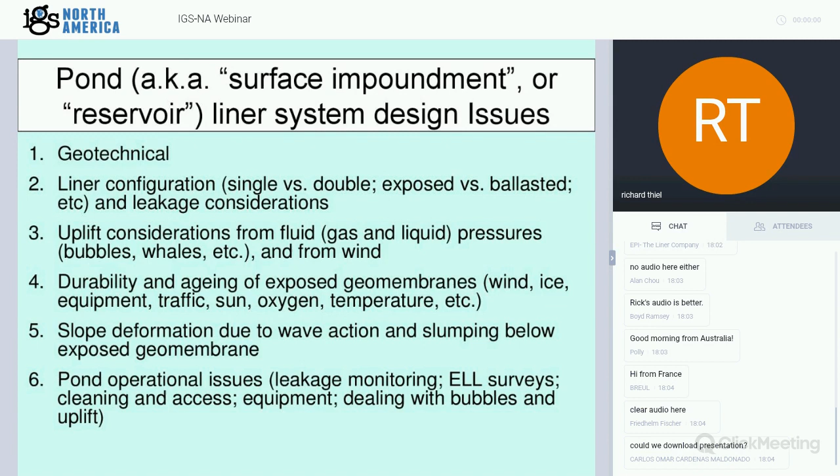So we'll dive into it on the first topic of the geotechnical concerns with ponds. So I have four geotechnical concerns that I typically think about when designing a pond. And the first one has to do with understanding the hydrogeology and the geology that's going to occur below your facility.

It's very important to understand where high groundwater will be, especially when you have a lined pond. So don't dare design a lined surface impoundment or pond without understanding where the high groundwater will exist, because that has a lot of influence on consequences that can occur with your lining system. Typically you do some borings and you understand the geology and the hydrogeology. Typically the project will involve excavation of the soils and embankment construction to create the dikes for the pond.

The soil type will influence how the dikes react against loading conditions for potential saturation, for slope stability, and for the subgrade preparation for the lining system. So understanding the soils that you're working with is very important.

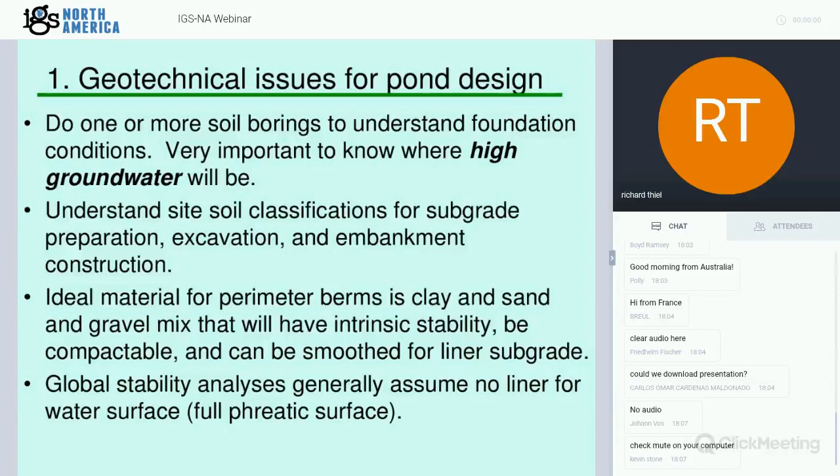And then finally, the global stability analysis of the pond structures is an important aspect of every project. You can have whole courses just on global stability analyses. I just wanted to mention that relative to liner systems in ponds, the standard engineering approach is to assume that there is no liner

extant when you're doing your global stability analysis. There have been a number of case histories showing that, in fact, a full phreatic condition can occur through the perimeter dikes as if the liner's not there.

If you don't assume that, you're not following industry practice, and there have been demonstrated failures because that was not considered.

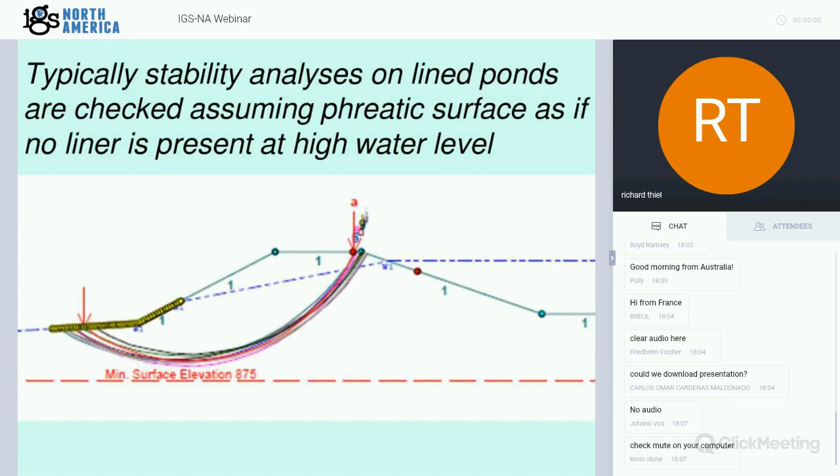Part two of the outline is how to decide on what your liner configuration would be. Later on, we'll discuss perhaps choosing a type of geomembrane. That's not what I'm talking about now. It's what is the configuration of the liner system?

You could say no liner system. For example, on the very large dams and large reservoirs, typically they're earthen or concrete dams, but you don't necessarily have a liner all the time. But this webinar is focused on ponds that do in fact have geosynthetic liner systems.

So you could have a liner configuration that has a single geomembrane, for example. You could have a double liner system with a leakage collection layer in between, which is very common for most important ponds.

Then for the upper geomembrane, do you leave it exposed, which is very common for reasons of capacity and cost, or do you cover it with soil to protect it? There's various reasons we'll go over later, but if you protect it with a ballast layer, that's a very key decision to make up front.

And then finally, is there a need to control fluid pressures below the liner system? You may have high groundwater conditions. You may need to consider controlling leakage through the entire liner system, and you may have air and gas fluid pressures existing. And so you may design some sort of an underdrain. So you have key decisions to make on your liner system configuration.

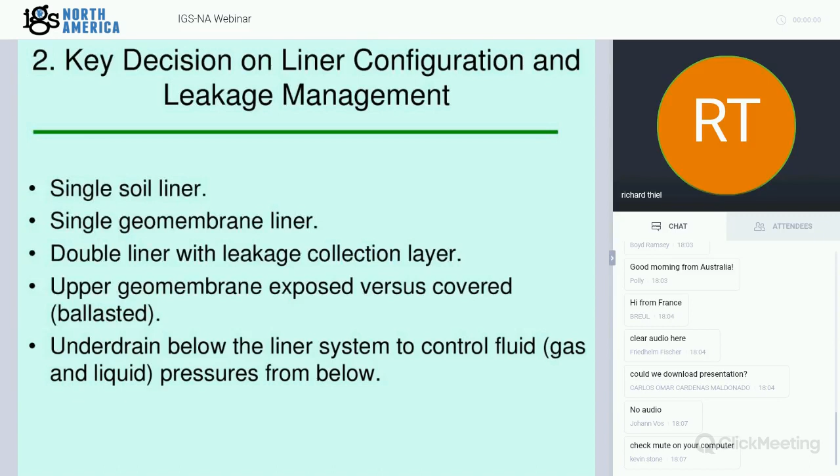Part of that decision has to do with how you would manage leakage. Leakage is something that I believe is mandatory to consider. J.P. Giroud, considered a father of the geosynthetics industry in many regards, has an adage that the industry holds, many of us believe is true, that all liners leak. No matter what the quality of the initial liner material is, or the level of care that the contractor takes, or the scrutiny of the CQA program, I believe that you should always assume that the liner will leak.

And they very often do as they age. There's a lot of emphasis on a push towards zero leakage in the conferences. It seems to be a popular topic. I personally feel that it could lead to some misguidance if people believe too strongly in zero leakage. I think you have to assume there's going to be leakage and wrap your arms around it in all projects.

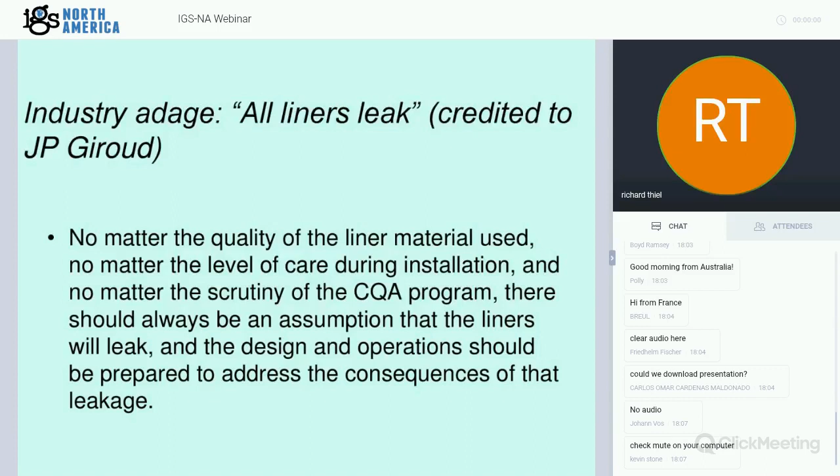Therefore, you must, I believe it's incumbent upon you to address the consequences of leakage. And once you understand the consequences, then you can make the design decision on your liner system configuration. So I list here 4 consequences of liner leakage in a pond.

And what's the difference between a pond, say, and a landfill? One of the key differences is the high head situation. And so the consequences of leakage can be much greater. So certainly we have environmental consequences. If the contained liquid has chemicals in it that would contaminate the soil and the groundwater below, so we all can relate to that.

We can have significant geotechnical consequences. Of course, high earthen dams, that's the primary technical issue, are the geotechnical consequences of how seepage occurs through these dams. But in a lined pond, unanticipated leakage can result in piping, tunnel erosion, leading to sinkholes, saturation of the embankment that may not have been anticipated that can lead to slope failures.

A third consequence is the operational problems that can occur. One is the loss of valuable solutions in the mining industry or industrial plant, or water for a decorative pond, or a pumped storage project where you want that water available for nighttime generation of electricity. Also, if you have leakage, you may have to shut down the pond to fix the leak. So these are operational consequences of leakage.

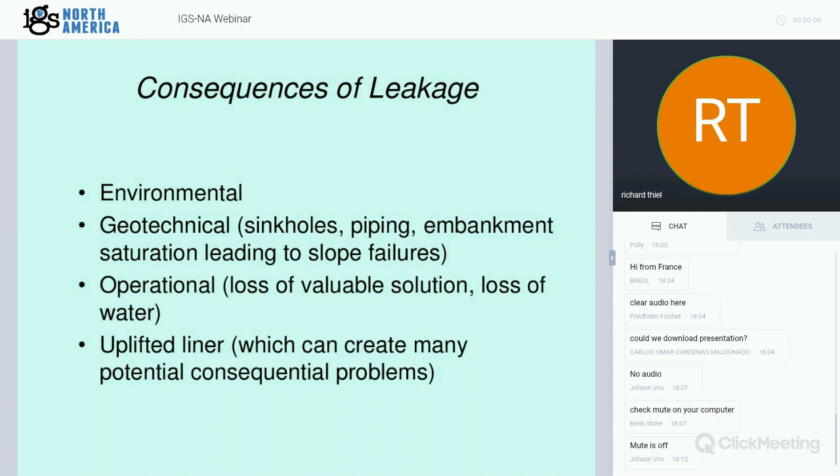So, recognizing those consequences, we could say that there are 4 levels of leakage control. One is none whatsoever. There's no monitoring, there's no collection, you have no idea how much is leaking, and that would have to be a non-critical situation, a decorative pond where you kind of hope to slow down the percolation into the ground, but if there's some leakage, it doesn't have any real consequences.

The second level is you might have some control but no real detection and no real collection. So you might design some sort of drainage gallery underneath, but it sort of disappears, and there have been cases where there is confident control of leakage that it will not create a geotechnical problem, but there's no real monitoring. Again, this would be a non-critical situation.

Then there's a third level of control where there is perhaps a leaky foundation, say a pond. A lined pond is retrofitted over the top of an old concrete or an old asphalt foundation that's leaky. You have some monitoring, some indication, perhaps some ability to collect the leakage, but it's not pervasive at 100%. And so again, that leakage has to be acceptable.

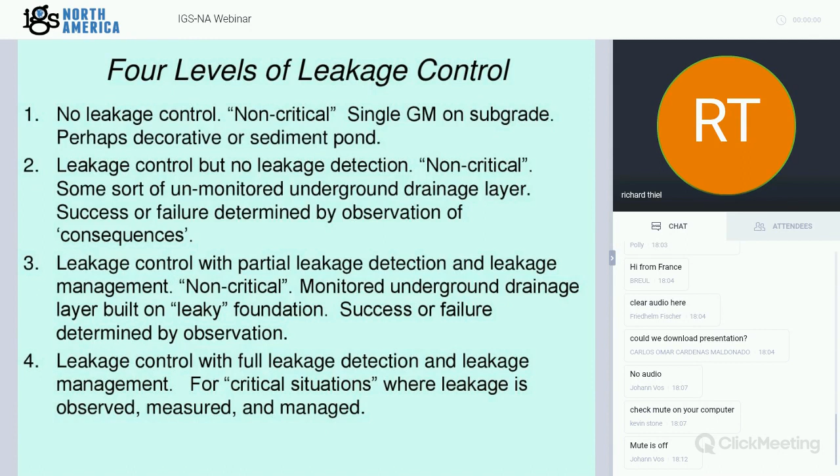The fourth level of control is for most critical situations where it would be unacceptable to have a significant quantity of uncollected and unquantified leakage. And for most important ponds, this is the case.

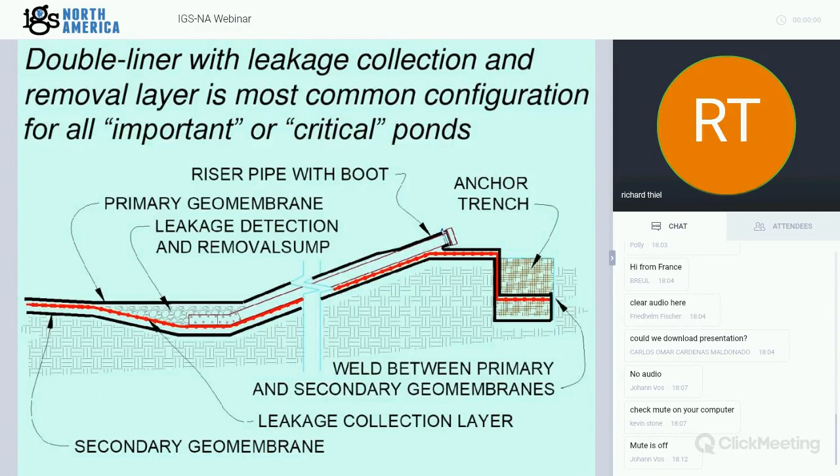For most important ponds, by the prior reasoning, you would have to conclude that really the only effective way to know that you're collecting almost all of the leakage and you're able to quantify how much is leaking is to have a complete double liner system with a leakage management layer in between the two liners, such as this diagram shows.

For those types of facilities, you would have a double liner with a leakage collection layer between, such as a geonet or a gravel layer. There would be a sump at the low end where you would be able to monitor and pump out the leakage or drain it by gravity.

You would have to have a slope typically on the bottom of your pond. I'm recommending a 1.4% average slope as a somewhat dependable slope to create drainage and to allow for the movement of gas bubbles.

If you have less than 1.4%, there have been examples where localized high spots and depressions caused by grading tolerances and soft subgrades will not give you dependable drainage and you will not have a dependable mechanism to move bubbles or hippos or whales in the pond. So that's a published number that's been derived, the 1.4%.

If you need to make penetrations in these types of ponds, it's generally best to make them perpendicular to the liner. That's the best configuration for creating a good penetration and one that can be repaired.

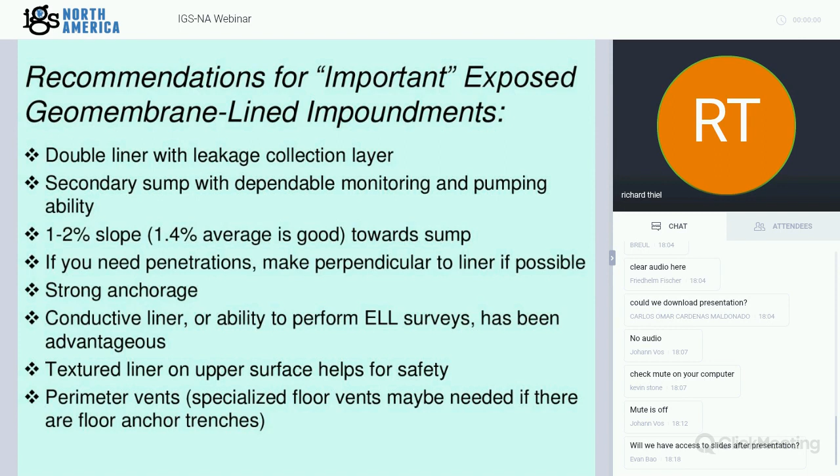If you have a double liner with a leakage detection layer and a collection layer, there are various materials that can be used. You want high transmissivity materials between the liners. Generally, a gravel or a geonet or geocomposite are very dependable materials.

I've also actually used the space that's created between two textured geomembranes where one is laid right over the top of the other, and measured the transmissivity of that space and found it to be quite acceptable.

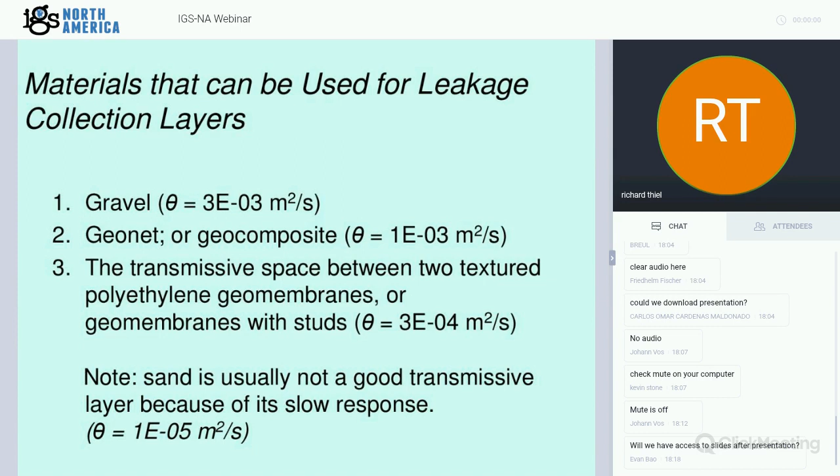This compares to a poor transmissivity layer, which is sand. Fine sands and medium sands actually impede leakage quite a bit. They don't drain very well, and then you have problems between gas and liquid phases blocking each other's flow. So sand is generally not a good layer between two liners.

This 20-acre pond was divided into 5 sectors, and one of the sectors, 4 acres, in fact, reported leakage. We were able to estimate the size of the hole by the leakage rate. We were able to locate the hole, and basically it validated this technique of using simply 2 textured geomembranes to provide a transmissive space.

So it was a project-specific design. Interesting case history.

Now, if you have leakage between your liners, what is an allowable leakage rate? Or sometimes it's called an action leakage rate, the leakage rate at which point you would do something, such as shut down the pond and look for the leak and repair it. So this is a good question.

Often it's regulated. It might be written in the permit for the actual facility. There's been various surveys done, and there are various regulations that we can look at. A number of, for example, 5,000 liters per hectare per day, and you divide by 10 to get about 500 gallons per acre per day, is a type of leakage that's common, say, around the Great Lakes of the United States for various types of wastewater ponds.

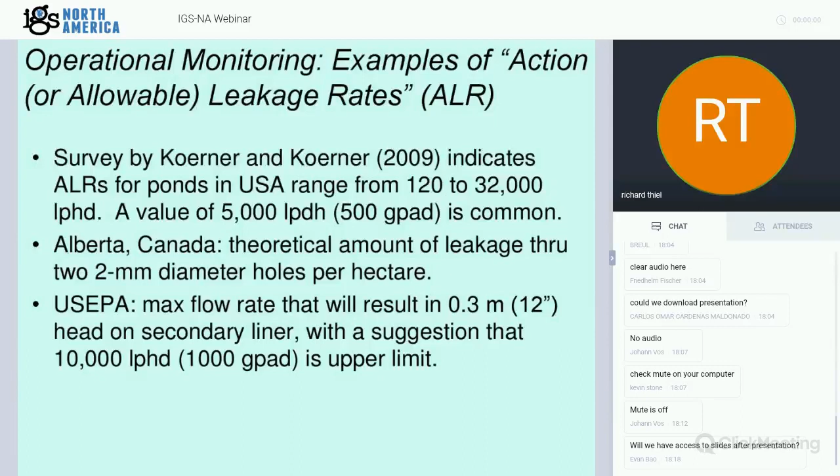There's an example from Alberta, Canada, for ponds in that region where the allowable leakage rate is the theoretical calculation of leakage through 2 millimeter diameter holes per hectare. The US EPA for wastewater ponds suggests a maximum flow rate leakage rate to be allowed that would result in a 0.3 meter or 12-inch head on the secondary liner. They provide a suggestion that 10,000 liters per hectare per day, or 1,000 gallons per acre per day, is a suggested upper limit. So those are interesting numbers to consider.

Theoretically, what's the maximum that might satisfy that requirement of 0.3 meters of head on the secondary liner? I did a calculation where if you have a double liner system with a high transmissivity geonet between the 2 liners, you can show through a calculation described by an article by Giroud et al. in 1997 in Geosynthetics International, that a single defect could leak up to more than 50,000 liters per day, not per hectare, 50,000 liters per day through that single defect, which would be more than 13,000 gallons per day. The maximum head would occur over that point and would be less than the 0.3 meters. So that gives you the idea of an upper limit.

That amount of leakage could easily be managed in a sump pumping 9 gallons per minute. But what it would suggest is perhaps when you're getting to a flow rate of 3, 4, 5, or 6 gallons a minute, 24 hours a day, 7 days a week, you might want to consider locating that leak and repairing it to stay in compliance and have a secure system where you're not putting too much head on your secondary liner.

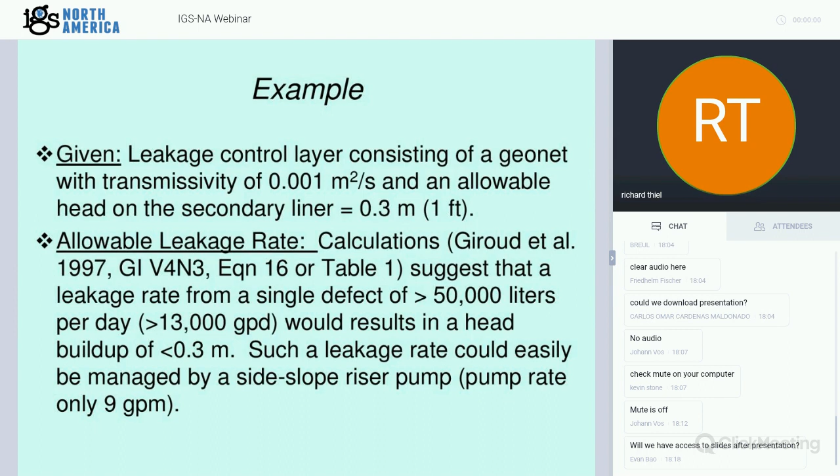Okay, let's touch on the question of ballast. Ballast on a liner is a good idea from many points of view. Many owners elect not to put ballast on their liner. Ballast meaning simply a soil covering on the liner, or maybe a riprap covering, or articulated concrete blocks, or geocells that are filled with gravel or cement.

Good reasons to put ballast are: it provides pressure on the liner that creates intimate contact with the subgrade. This greatly impedes the amount of leakage that would go through the liner because of that forced intimate contact between the liner and the subgrade. Also, the contact between the overlying soil and the liner impedes leakage. So that's one good reason to have ballast.

The ballast will also protect the liner from equipment or animals. So that's a good reason to have ballast.

It will largely prevent the generation of bubbles. It'll prevent the liner from uplifting due to gas and air bubbles. And it will also provide ballast to counteract hydrostatic uplift due to groundwater. So these are good reasons to have ballast on liners.

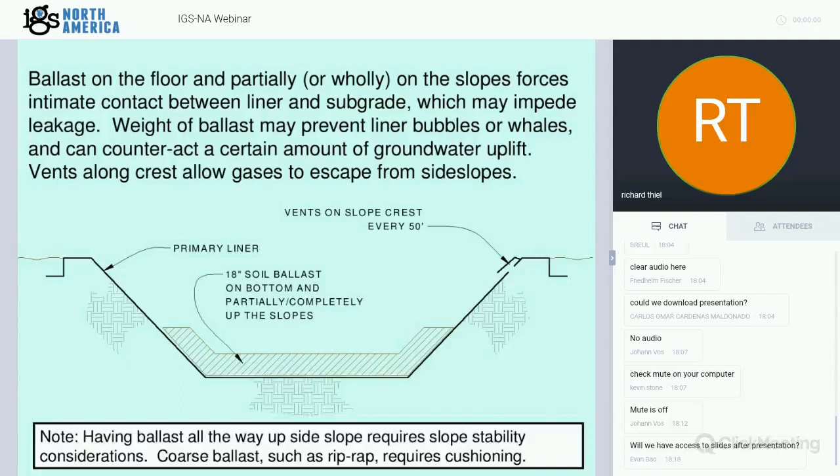I did have one question that showed up here asking for any opinion on concrete slab ballast. Any type of ballast that you put on a liner, yes, any type of ballast on a liner...

You have to put the appropriate cushioning layer on the liner to protect it from the ballast. Now, if you have a fine-grained soil, you can probably put that directly on the liner. Things like riprap or articulated concrete blocks or concrete slabs are very good. So my opinion on concrete slab ballast is it's very good.

You have to protect the liner from the concrete and place it on there carefully. But once it's on there, it will provide all of those benefits of ballast that we described. And another benefit of ballast, particularly concrete slabs on the slopes, is to protect the perimeter slopes from the action of wind and waves. So yes, concrete ballast is common and it's very good. Thank you for the question.

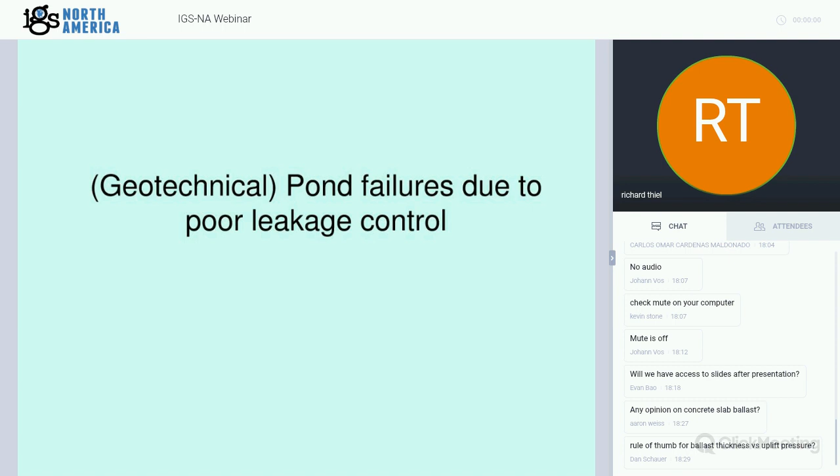Let's show some examples of ponds that have failed due to poor leakage control. Here is a drinking water reservoir that obviously had a sinkhole develop. This is a single liner system. It had some limited amount of leakage control in the form of strip drains, which I see as a common design in many ponds. People put in, say, geocomposite strips - they'll take a chainsaw and cut up the roll in, say, 2-foot wide pieces and put them at some spacing. I think this pond had them every 30 to 50 feet.

And like many drinking water reservoirs, they had a floating cover on top of this one. To drain the stormwater off the floating cover, in this case, they used scuppers with pipes that went down through the pond and then penetrated the bottom liner, then elbowed and drained out the face of the downstream area of the pond. Well, one of those penetrations, this is the actual penetration, had a leak.

The typical location is the sleeve to skirt connection, which is a weak spot. And you could say, well, this is the cause of the pond failure. Yes, but no. Although many of us could design a better penetration detail, in fact, you have to expect that this type of leakage would occur. So the real reason that this pond failed is that there was not leakage control and leakage management through the liner system, and the leakage consequence was a geotechnical failure.

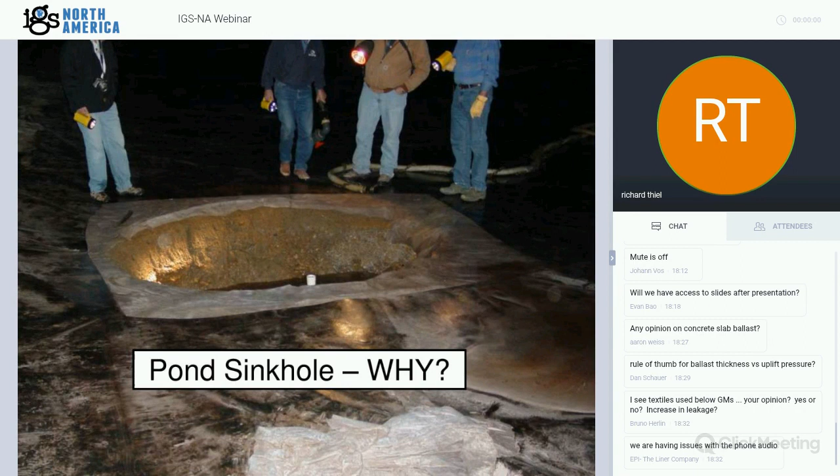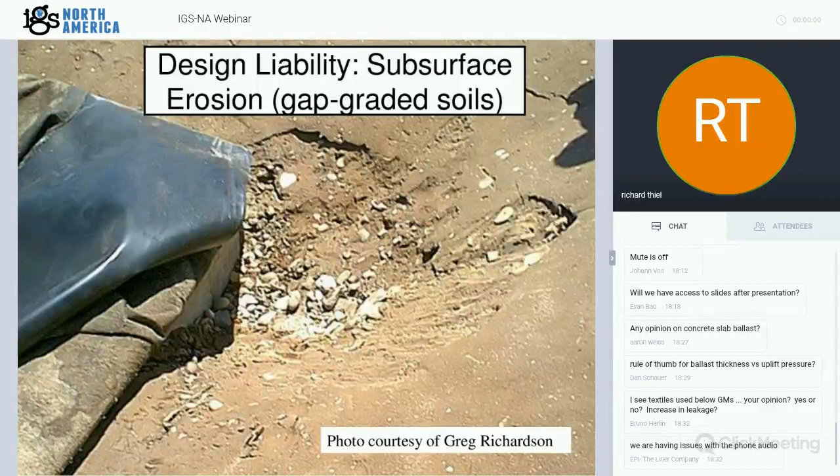And you say, well, the problem was leakage at the penetration. Yes, but no. Ultimately, it was incumbent on the design to assume that leakage is going to occur, especially at a connection such as this. The craftsmanship actually was pretty good. The geotechnical consequences were simply not taken into account.

What was the ultimate solution for this pond? A double liner with a leakage management layer between the two liner systems.

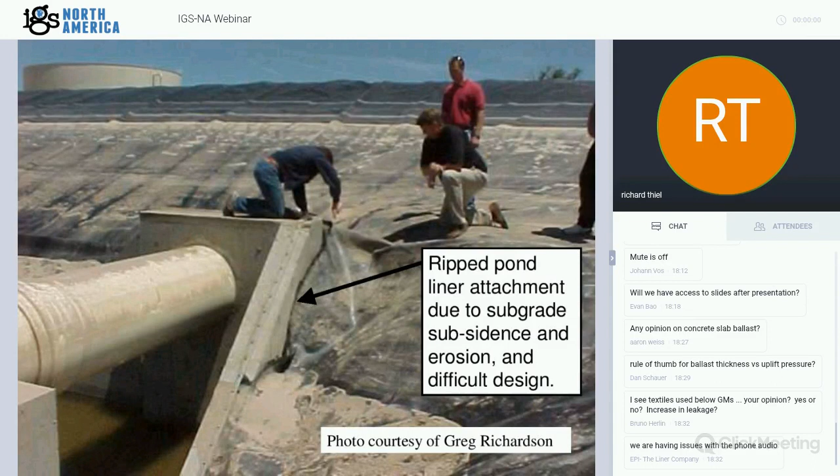All right, so those were just some interesting case histories showing the value of having a leakage management layer. So now we move on to the third topic in the outline, which is liner uplift considerations when you have a pond, especially when you don't have ballast in an exposed pond.

I've listed 4 causes of liner uplift: high groundwater, then a localized leak, which would also perhaps simulate high groundwater, causing buoyancy and uplift in a localized condition, gas and air bubbles, and then wind also causes uplift, especially when the pond is empty.

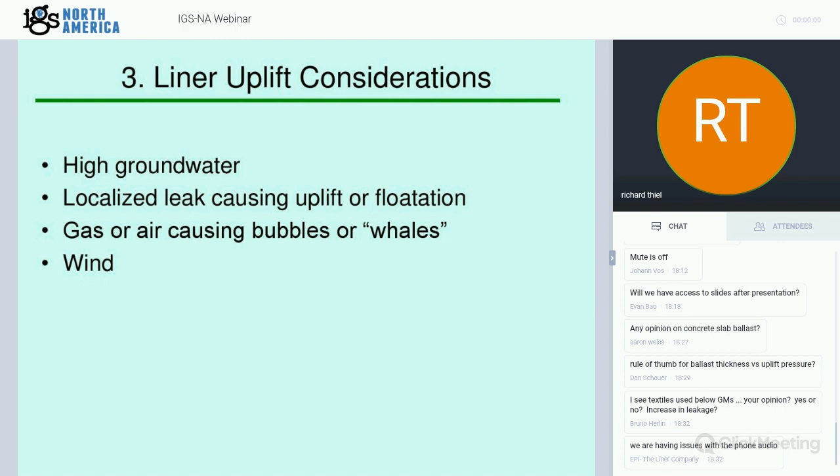So here's an example of a pond. It had a thick double liner system, perhaps 1.5 meters thick, and that whole thickness was uplifted by a high groundwater condition. You can see the liner in the middle of the pond being uplifted, and this could potentially damage the liner. In this case, a deep perimeter trench was dug around the pond to lower the groundwater, and the liner just sat right back down and was not damaged.

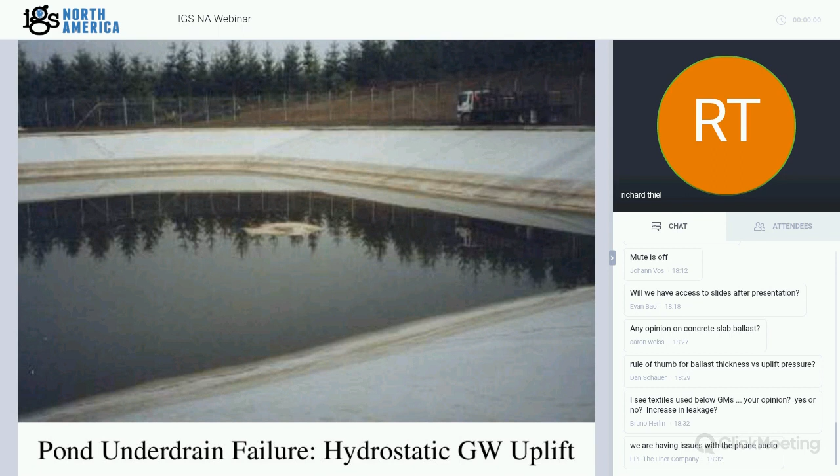So it's always important to know where your high groundwater is. The other type of fluid is a gas, so you have liquids and gas pressures that can cause uplift.

Now the most common uplift problem is gas under a liner caused during initial deployment. When you deploy a liner, it typically has a certain amount of wrinkles. Well, what is below those wrinkles? It's air. And if the subgrade of the pond is relatively impermeable, or it's a fine-grained soil with capillary water, the air is trapped below the liner, and when you fill the pond, those trapped air wrinkles may coalesce into a bubble. That's the most common source of bubbles on initial filling of a pond. So don't be surprised when your pond initially has a bunch of bubbles in it when you fill it up.

The best way to get rid of those is to have a good slope on your pond, and the bubbles move upslope, and then you have perimeter vents, and the bubbles burp out the vents.

Another cause of air or gas bubbles is biological fluids that leak through the liner and then continue to create gas, and the gas is trapped below the liner and creates a bubble.

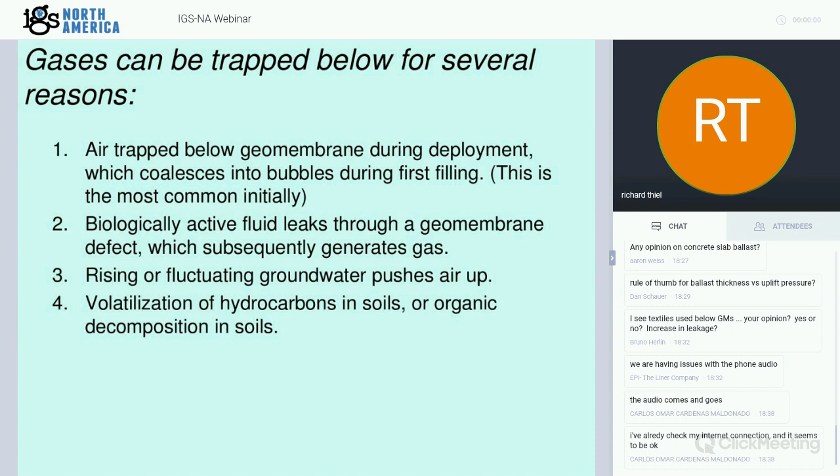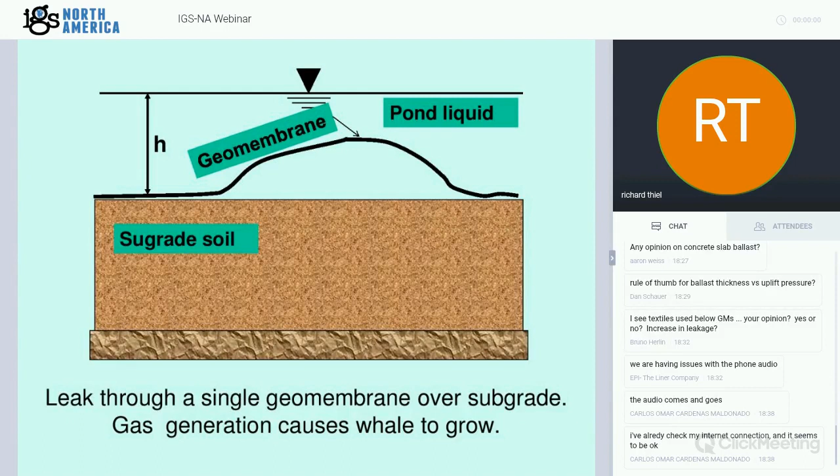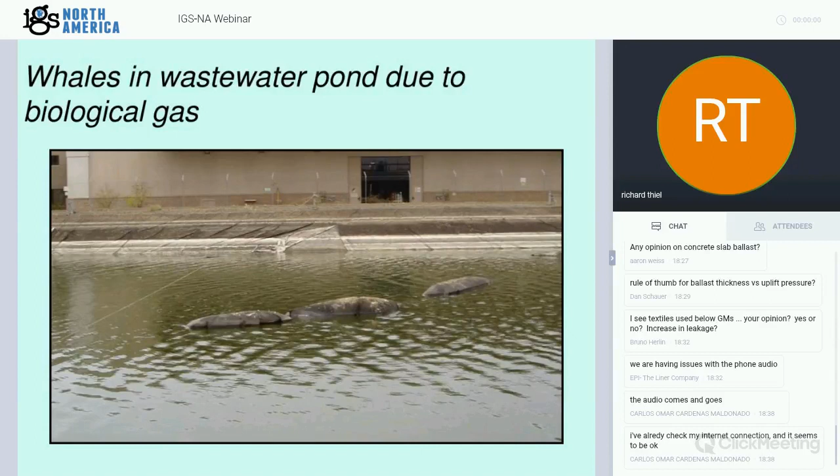So in the past couple of years, I've made what I believe is the first attempt to quantify the levels of pressure, the size of the bubbles, and what the resulting stresses and strains would occur in the liner system as a result of bubbles that are observed in ponds. The last issue of Geosynthetics magazine and the next two issues will describe all of this.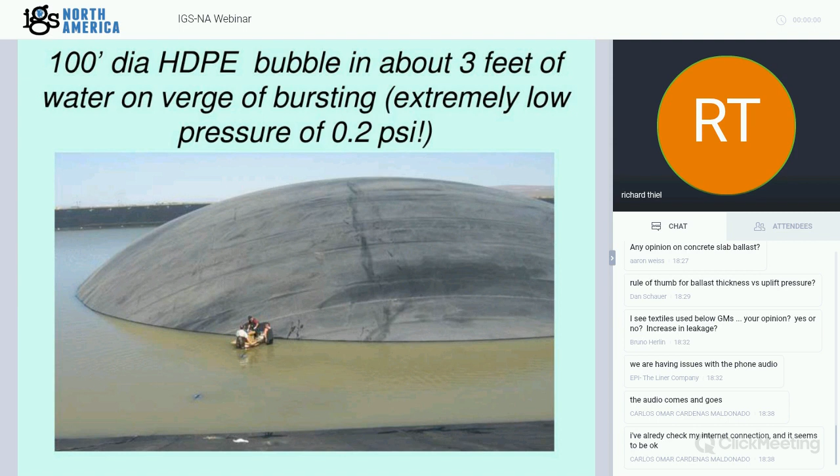Now look at the pressure, how low it is. 0.2 psi is enough to burst this. If you poke this with a needle, which in fact was done, the pressure is very low, and yet you're about to burst this geomembrane, and it's easily proved.

These are some of the results of the calculations that were done. If you just look at, say, the large bubble of 33 meter diameter at the water surface, that's showing in a water depth of just over 1 meter. The diameter of that bubble at the base on the floor is about 36 meters, and it has a pressure of only 1.3 kilopascals, which is slightly less than 0.2 psi. Very low pressure, and that's on the verge of bursting at 12.4% strain.

That same size bubble in a half a meter depth of water would only be at about 4% level of strain, and that's what I would consider the maximum allowable state for a bubble.

Now go to the other end, where we have the smallest bubble that could be at the maximum pressure condition. That would be a bubble that at its base would be about 8.5 meters in diameter, say close to 30 feet. But the part that's sticking up above the water is this B4 dimension here. That's only 0.28 meters, so almost a foot. So it's not peeking out of the water very much.

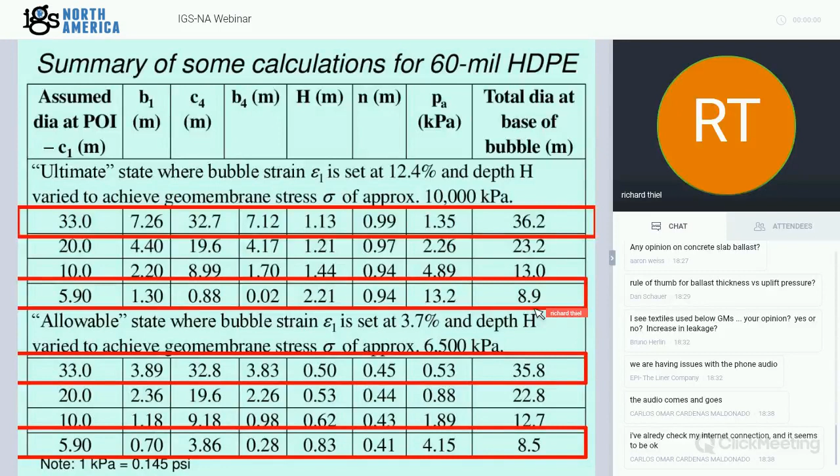So, management option for bubbles, which are very common. There's been several papers written about bubbles, written in the literature for 35 years. To manage bubbles, you need vents around the perimeter of your pond to allow the bubbles to burp out the side. A pond bottom slope of 1.4% on average is a fairly safe, constructible level of building your ponds, and 2% is safer.

That would allow the bubbles to move by the unbalanced hydrostatic pressure caused by the bottom slope. If you decide to use a gas drainage layer at the bottom to move the bubbles and allow them to vent, that drainage layer must absolutely be maintained in a dry condition. If it's not dry, it will not work. It will only take a few inches of water, or a couple hundred millimeters of water back pressure, to totally defeat an underdrain meant to relieve gas pressure. It's not appreciated how little water would do that.

There's excellent case history of a pond with a complete geocomposite underdrain at 0.75% slope. It did not allow the bubbles to move, and the bubbles got stuck. They had to be pushed out manually, which is point number 4.

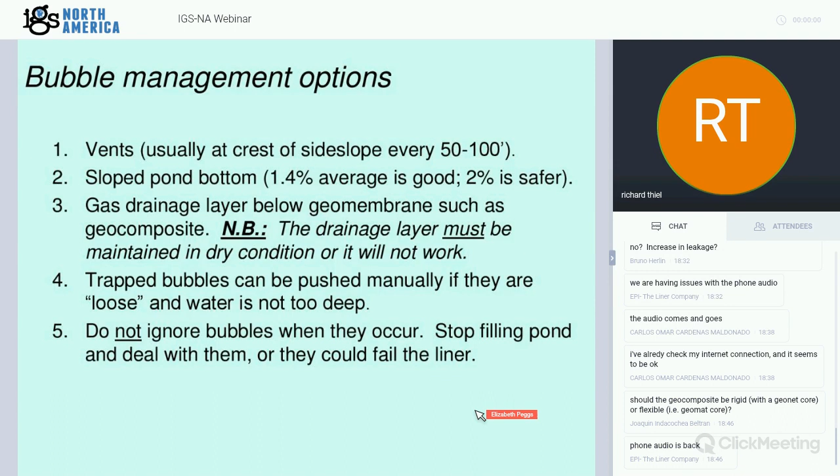If you see trapped bubbles when you're filling the pond, push them out manually when they're loose. In my papers, I describe how if you keep filling the pond, the bubble gets stiffer and stiffer. It gets more and more difficult to move until you can't move it, even with several men trying to push on it, and it will cause failure. When they're loose, you can move those bubbles, push them manually, and work them to the edges. Do not ignore bubbles when they occur. Stop filling the pond and deal with them. That's the bottom line.

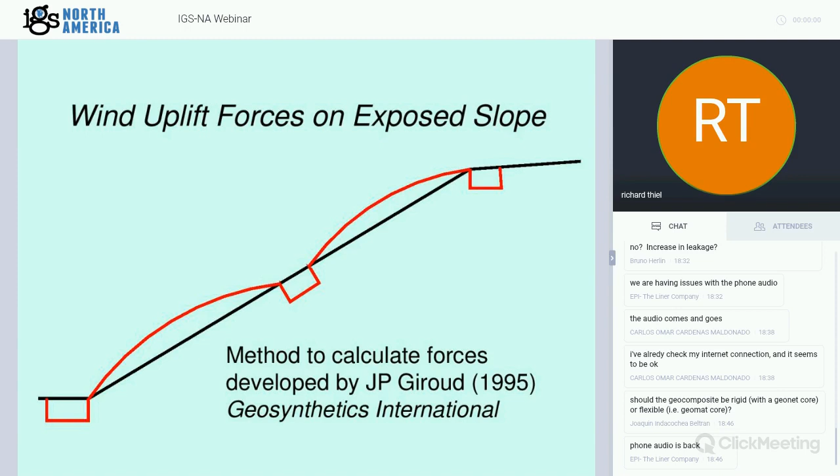The final uplift consideration is wind, especially when your pond is empty. The effects of wind on exposed geomembrane liners has been well thought out by J.P. Giroud, with a seminal paper in 1995 published in Geosynthetics International. There have been several follow-up papers to that one, and the key is basically to look at anchor trenches and the spacing between anchor trenches if you don't have ballast.

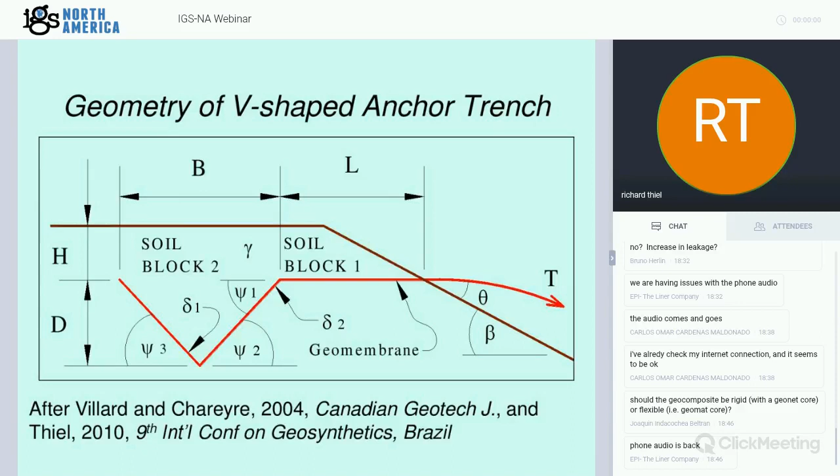If you have ballast, that solves this problem. If you have an exposed geomembrane pond, you do not design your liner to pull out before it rips. You design it so that you give it the full benefit of the strength of the liner. The best reference on designing anchor trenches ever was published by Villard and Chareyre in 2004 in the Canadian Geotechnical Journal. I took off from that and did a few other things in a paper in 2010, but they deserve all the credit for coming up with the best model of how to get the most out of your anchor trench.

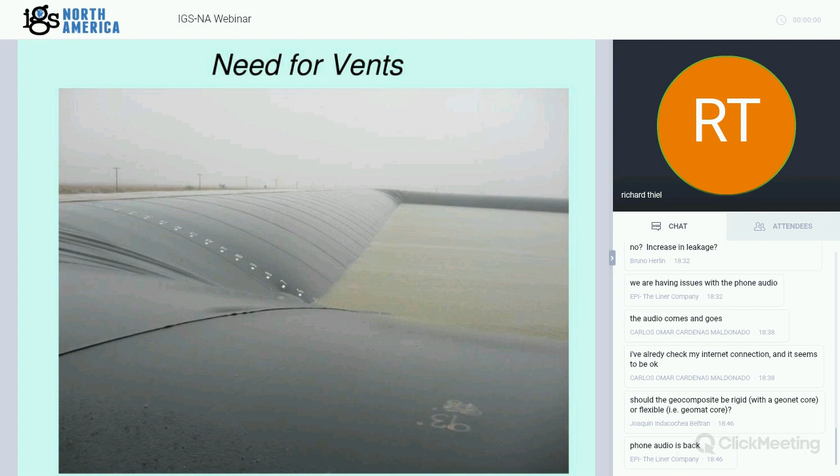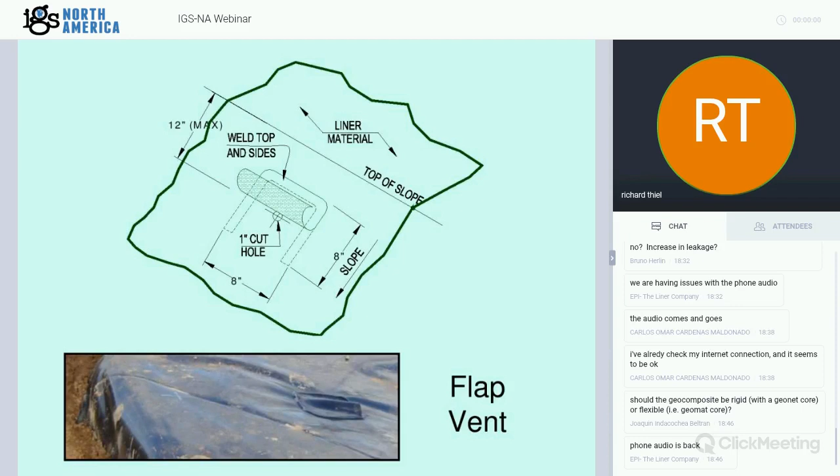Perimeter vents are used not only to burp bubbles, but also as an antidote to neutralize the airfoil effect due to wind pressures, as shown in this slide. Perimeter vents are easily made by simply cutting a hole at the very top of your liner system, then putting a patch over the hole where it's only welded on 3 sides. You don't want to put these types of vents too low. This slide from GSI shows how wave action ran water into some of these vents and then caused erosion of the subgrade underneath the liner system.

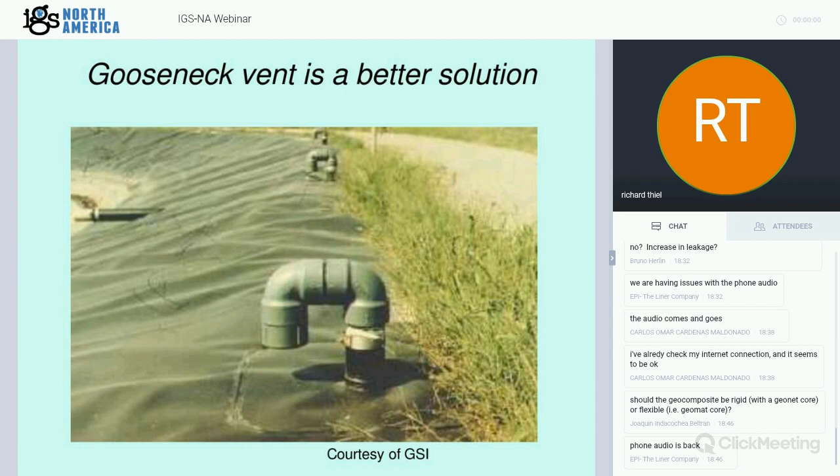Okay, the 4th topic is aging and durability of exposed geomembranes. The way that an exposed geomembrane ages, and its relative durability, has 2 aspects to it. One is the chemical and polymeric aging, and the other is the physical and mechanical durability. The largest degradation mechanism for the polymer is usually attributed to ultraviolet wavelength energy degrading the resin, and higher temperatures.

So you get both of those mechanisms with an exposed geomembrane. With UV and oxygen and higher temperatures, you'll get oxidation and chemical reactions occurring, hydrolysis for example, in the resins. It can happen in the dry area, it can happen with the contained fluids, perhaps there's some chemistry with the fluid itself. And it's especially nasty often at the water line where it gets the wetness and the dryness.

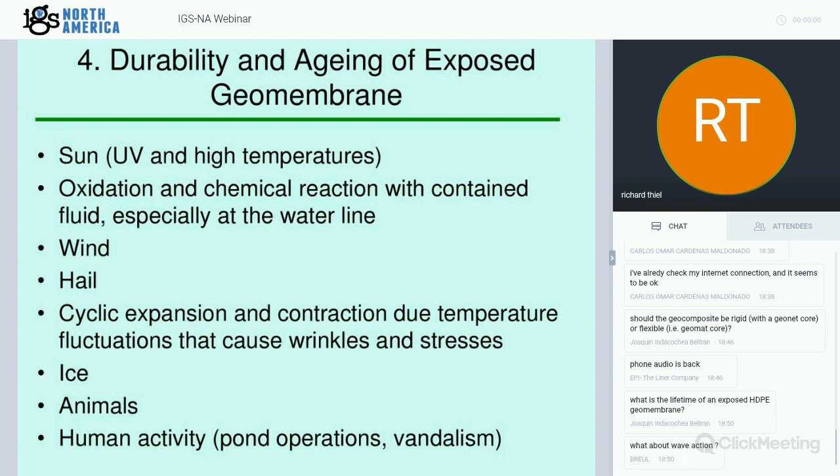I've got a question here about wave action. I just talked about wave action on wrinkles, it's very detrimental, and I'll talk about wave action more on the perimeter of the reservoir a little bit later. Ice, when it forms, can be pushed around by the wind and physically bang against the liner, so that can be detrimental. And then of course there's animals, including humans, walking on the liner, walking in the pond, equipment, the use of pumps, boats, cleaning, all those types of things affecting the durability of your liner.

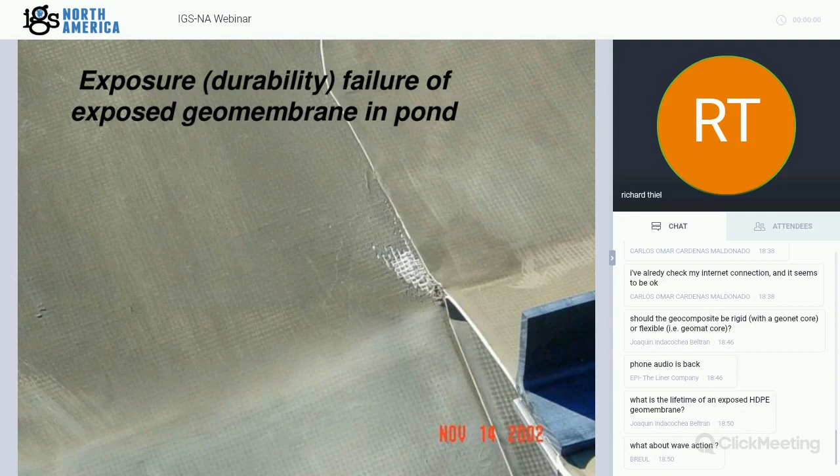Here's an example of exposure to temperature and UV degrading the polymer over time. You see a reinforced polypropylene basically failing - the resin is failing as it ages here.

Here's a mechanical failure, a contraction of the pond liner in a cold event. It ripped the extrusion weld right off the perimeter where it welded to a concrete embedment - thermal contraction stresses.

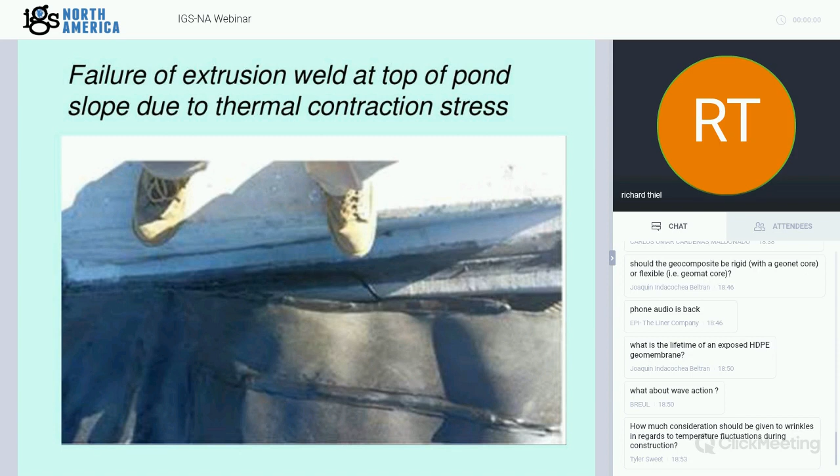Here's a physical durability issue with hail. You can see where the hail marks caused penetrations in the liner. It's wicking up moisture from the subgrade, so you can see the dark spots where the hail has caused damage.

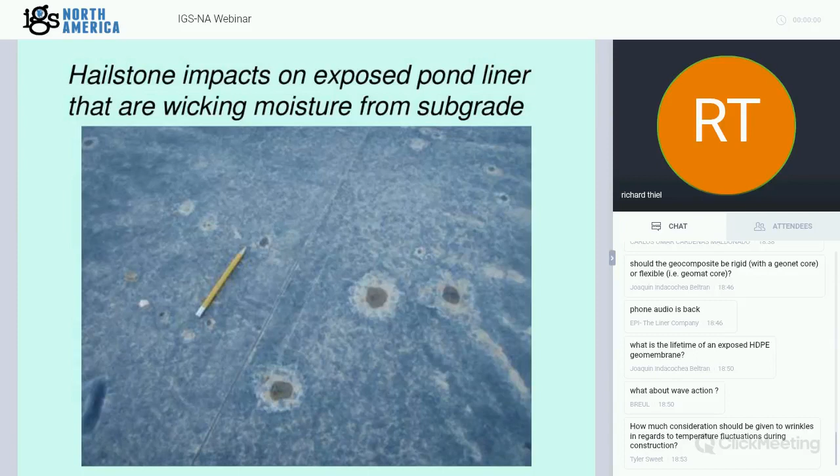Then how do you protect against this - a tornado picking up a Conex box and throwing it against the liner system? Of course the only way you could have protected the liner in that case would be with ballast protection. Otherwise there's no way any liner would survive a flying Conex box.

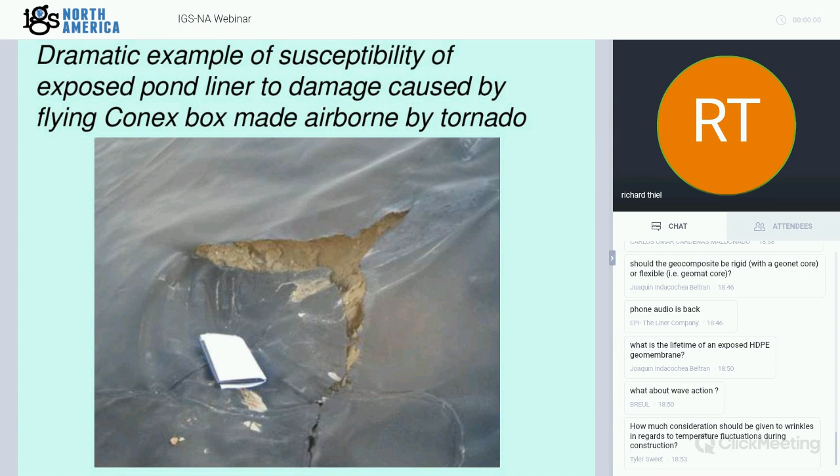All of this discussion is focused on how do you choose which type of geomembrane you would choose for your pond. There's a host of geomembranes available. I list across the top a few in this theoretical matrix. You have to consider such a matrix as a concept. I see very few people in practice actually utilizing a matrix like this, but it gives you a framework where on the left side you have all of the properties that you're interested in your liner. Across the top you have your various liner types, and you sort of weight the different factors and grade them and come up with your most desirable liner.

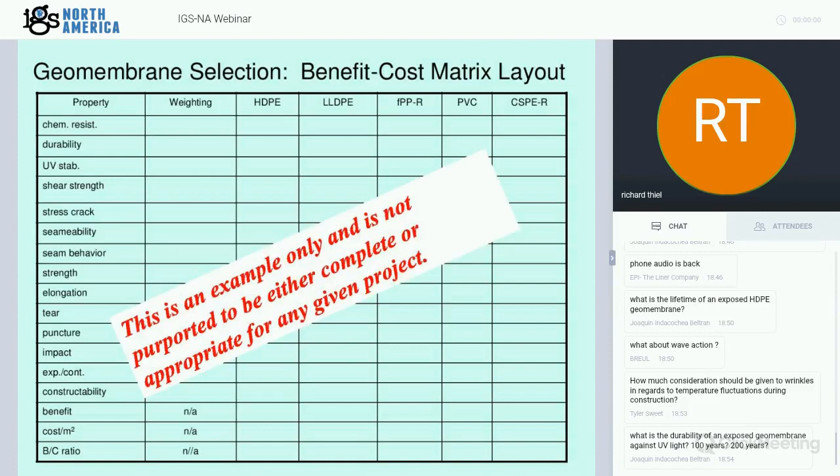I have a very good comment here - somebody says bituminous geomembranes are missing. Yes, I didn't intend this to be complete. I think bituminous geomembranes could be fantastic. I haven't had the opportunity to use them, so let's make special mention that those are definitely valid on the list.

I have another question: what's the durability of an exposed geomembrane against UV light? 100 years? 200 years? Recently there's been a very good publication by GRI or GSI on the estimated lifetime of various geomembranes. They're coming up with numbers, and it depends a lot on the temperature. But if you're just talking about the resin and it's compatible with the fluids and you're just talking about UV, they're coming up with numbers in multi-decades - 30, 40, 50 years for different kinds of resins.

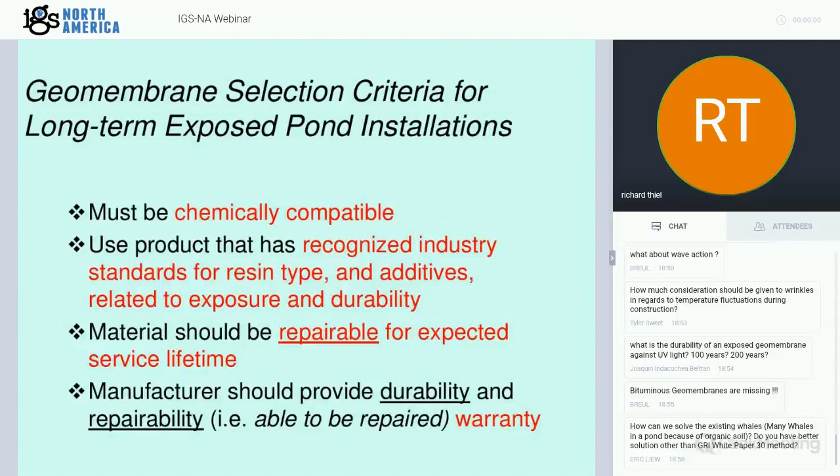And lastly, warranties. A good liner should have a certain level of warranty you can ask for — of course, you sort of pay for these things. Warranties you generally see for the material in the 5 to 20 year range. Some manufacturers have a sliding scale: if you buy a thicker material, they'll give you a longer warranty; if you pay more money for the material, they'll give you a longer warranty.

It's good to ask for a warranty about being able to repair it after a certain number of years. Why not? You should be able to get assurances you'll be able to repair it. Installation warranties are generally good for only a year, so you want to check after you cycle through some extreme temperature cycles and do a good inspection of your pond within the first year. Be careful of new products that are outside of the box with initial cost savings — if you're going to use them, they need more technical evaluation, and will somebody stand behind it?

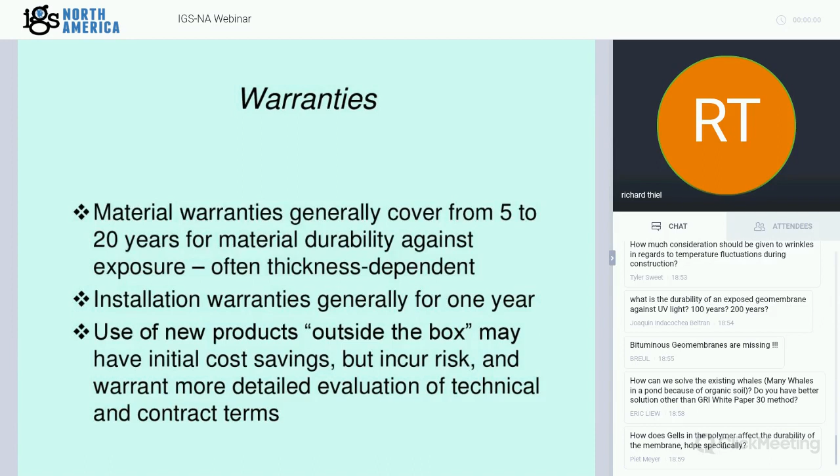Okay, examples of types of geomembranes. This is not an exhaustive list — somebody already pointed out I left out bituminous geomembranes. These are common geomembranes by type.

Flexible reinforced geomembranes: the most common ones are polypropylene, chlorosulfonated polyethylene (CSPE), the most famous trade name being Hypalon, and ethylene interpolymer alloy (EIA) — one trade name is Seaman Corporation XR3, XR5, but there are others. I'm not promoting any brand. These materials are also available unreinforced, but more commonly you find them in a reinforced roll good.

EPDM, which is basically a synthetic rubber, is most commonly unreinforced, but it's also available in a reinforced product. Most commonly it's unreinforced and used for certain ponds. It has poor hydrocarbon compatibility, but it's still used in other types of ponds.

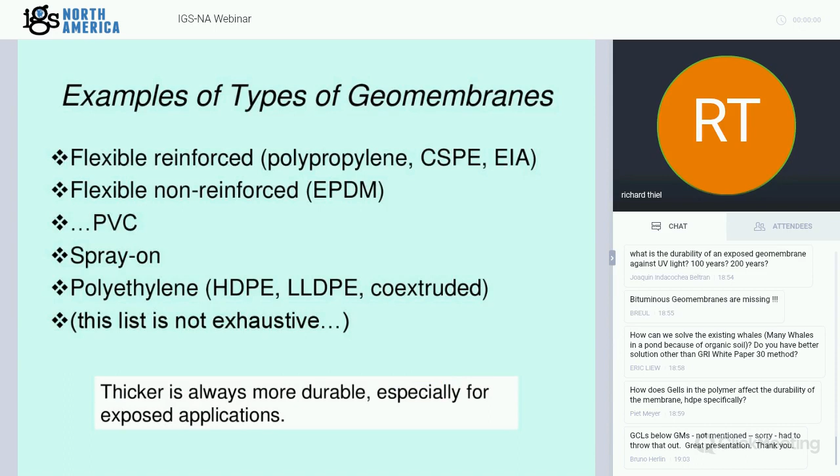Somebody else asked, how does gels in the polymer affect the durability of the membrane, HDPE specifically? I guess a gel is a blemish, if I understand the question, and any blemish in the geomembrane is a potential point of weakness. You shouldn't be seeing gels in your geomembrane, if that's what you mean. Okay, I'll move on.

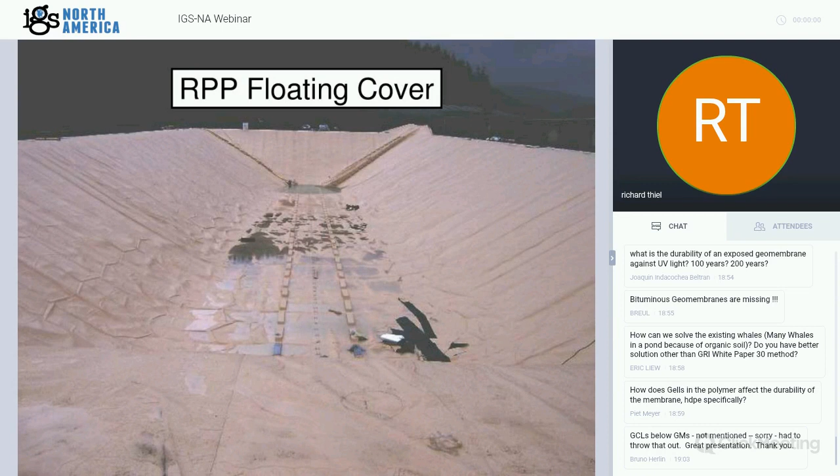Just a few atmospheric pictures of different geomembranes. Here's a floating cover. Floating covers are commonly made from reinforced, flexible geomembranes, especially in the potable water industry. This one's polypropylene. Usually you put the floating cover in when the pond is empty, it lays flat, and as the pond fills up, it goes up and down with the water level, and the excess slack is taken up with weight tubes. So that's what this shows.

Here's a very old installation in the United States. To my knowledge, it's still in service 45 years later in Moab, near Salt Lake, for evaporating ponds to reclaim salt. They're lined with PVC. The perimeter berms are covered with hypalon because the PVC was not meant for exposure to the sun, but if it's covered with salt, it's fine. The berms were hypalon. So that's a testament, 45 years old.

There are very, very large solar evaporation ponds for salt reclamation in the Atacama Desert, and the geomembrane of choice is PVC in those locations.

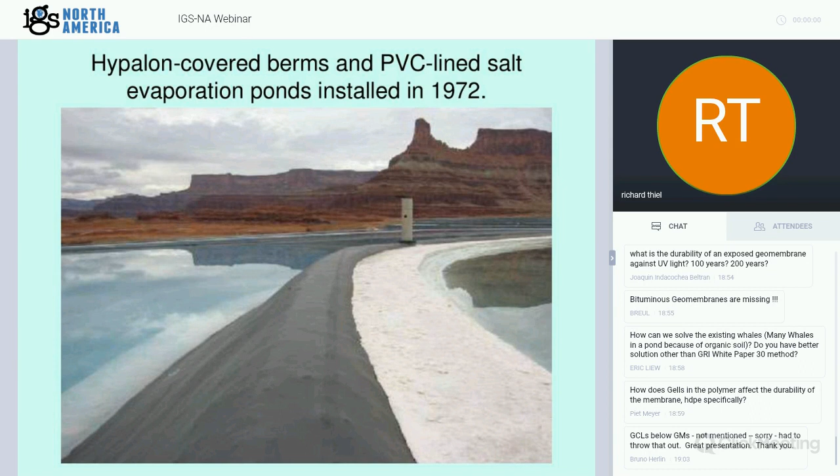Here's an example of EPDM, flexible, non-reinforced. It appears to be a stormwater pond application.

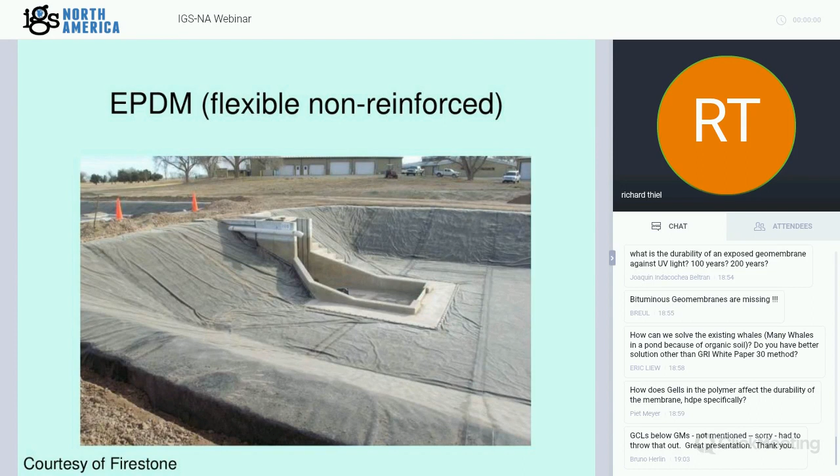A spray-on liner, again, typically polyurea, also polyurethane. You can adjust the set time. You can spray it on, or you can sprinkle on coarse sand to make it textured. You often spray it on top of a geotextile. It adheres very well to prepared steel and concrete surfaces. And it's typically expensive and often used in decorative ponds.

Polyethylene. Here's a pond, double-lined pond with polyethylene. The crumpled up stuff on the right side is simply a cover that's inflated during the wintertime.

Polyethylene's popular because it's got a great track record, durability, cost, repairability, availability of textured surfaces. But I think it has terrible issues with wrinkles, and stress cracking is ultimately the failure mechanism of polyethylene. At the end of the day, it's ultimately going to be stress cracking. There's been giant strides with polyethylene, and I use a lot of it, but that is the problem. The extrusion welding seams are just an endemic problem. Seams in all liners are a problem, folks, don't kid yourself. The fusion seams are pretty good in polyethylene, but the extrusion welding is definitely a weak link.

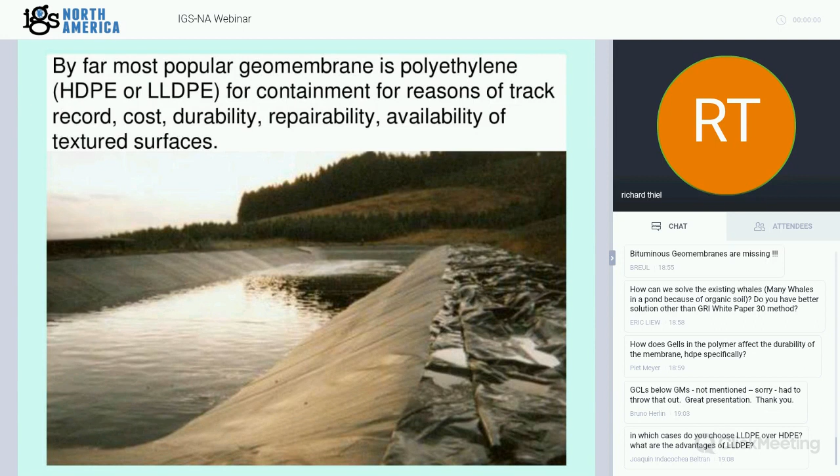When do I use LLDPE over HDPE? That's a question. For ponds, I guess I haven't. I've always used HDPE in ponds, but I use LLDPE in other situations, in heap leach pads and landfill covers. It seems that HDPE has a better exposure durability rating, I guess that's the bottom line. But maybe other people would have a comment on using LLDPE for ponds. I know medium density polyethylene is promoted quite a bit by various manufacturers for pond liners, maybe that wouldn't have quite the longevity. So I don't have a very good answer for that question. I think it's something somebody could look into. Generically, HDPE will pencil out better in terms of its exposure durability. Okay, so I'm going to leave it at that for answering that question.

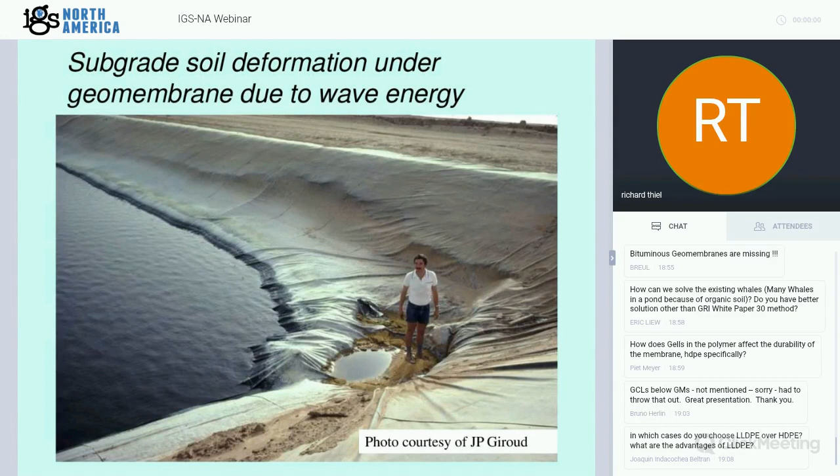Somebody asked a question earlier about waves, what to do about wave action. This part of the presentation has to do with the waves that create this kind of damage, which is deforming the soil under the geomembrane due to the wave energy. This is a slide from 35 years ago from J.P. Giroud. This is not a new issue, and I have many other projects I could show slides of. It's a common issue: how do you protect against wave action on the perimeter slopes?

The best mitigation by far, if you know your soils might be susceptible to it, if you have a long fetch distance and sandy soils, the best solution is to do cement treatment. Add 8% cement or something to your sand in the upper 6 to 12 inches. Yes, it's a cost, but that will solve the problem. There are other ways - you could put cement-filled geo-webs underneath the liner and then cushion the top of those.

If it's a really clayey soil and you're afraid of it, you might use lime instead of cement.

Of course, we talked about ballast protection, using the proper cushion and then covering it with concrete slabs, articulated concrete blocks, good old-fashioned riprap, cement-filled geocells, grout-filled geotextile mattresses. All these types of protections could be used.

If you're just trying to count on your embankment soils to resist the wave action, many people do, it's good to have something that has cohesion. If you just have a cohesionless sand or silt, it's going to deform over time due to waves. A loam, something that has sand and silt and clay, provides good structure and good cohesion to maintain that shape.

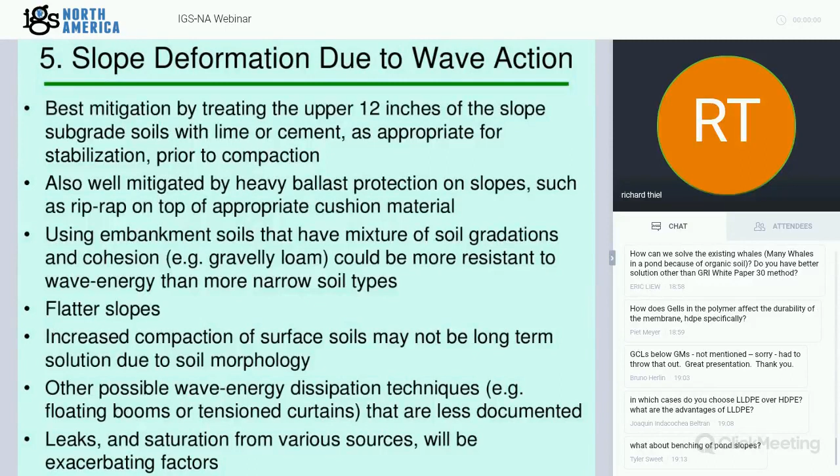A big exacerbating influence is leaks or saturation caused by other mechanisms. When the soil underneath the liner gets saturated due to leaks, due to infiltration through the crest of the berm, due to wet-dry cycles, vaporizing water and condensing at night and saturating parts of the slope locally, or an adjacent pond that leaks water through the berm between two ponds. When that soil becomes saturated, it's more susceptible to wave action.

Okay? So that's my talk on that subject. I hope it answered the question.

What about benching of pond slopes? I don't know. I haven't benched pond slopes except maybe to put an access road down. The access road is a sort of, I guess you could do some kind of a reinforced benching of the soils below, but benching is going to create bridging points. And so now you got to look at your geomembrane bridging over benching. I don't see benched pond slopes, and if you do bench it, you have to anchor the liner at the toe, on the inside toe of each bench, and then come over the bench, and it seems to greatly complicate it. Ponds and reservoirs that are lined are typically not benched.

Okay, we're coming in on the last section of the presentation. We have 15 minutes left, and I still have one unanswered question I hope to get to.

Pond operations. Okay, when you turn the pond over to the owner, the level of protection of the liner has to be commensurate with the equipment that's going to be used in the ponds. If they're going to throw in pumps or set pumps, if they're going to use aerators, there need to be landing pads for these pieces of equipment and not just a rub sheet. I mean, you need a piece of concrete or a gravel pad. If you're going to launch boats, you need surfaces that are durable.

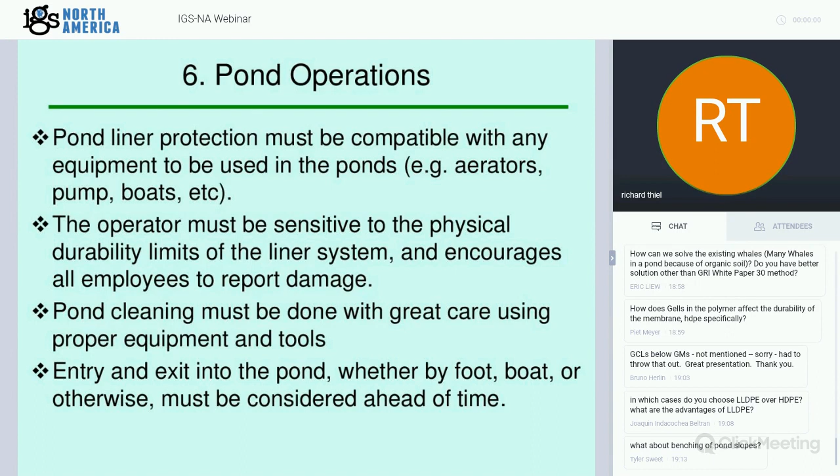This next point is one of the most important points. If you've gone to the trouble of doing a double-lined pond and you have a leakage management layer between the two liners, you have to monitor it and manage it. Otherwise, it doesn't exist and you wasted the money. Most of the litigation I do with containment systems is about ponds, not landfills. It is there, but it's mostly about ponds because ponds are exposed and everybody thinks they're simple. They are simple, but you have to respect certain principles, and this is one of them.

So you must have continuous monitoring and management of your leakage detection layer. Then go ahead and do regular visual inspections, look for obvious damage, look for slope deformation due to waves, look for animal problems, discoloration, different things. You can put fences. Ponds are commonly fenced to keep out people and to keep out big animals.

You can do electric leak location surveys. You can start out with a conductive liner, or you can do it on full ponds, and you can try to set your system up. Maybe you do it at quarter points in the life, because these can be expensive surveys. Maybe you do it halfway through the pond life, or two-thirds of the way through, or when you know you have a big leak, you do these types of surveys to find the leak.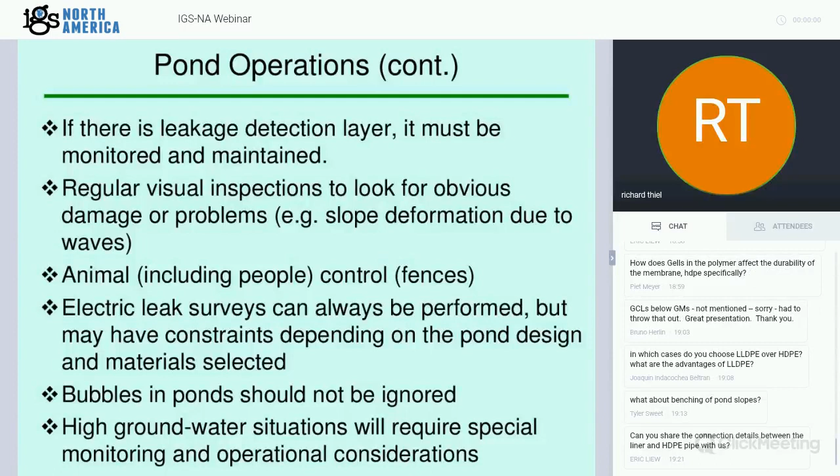Well, okay, so we did it. We made it through the presentation. I think I answered all the questions that came through. Now I see another one that just came through.

A couple more. Okay, so one says, can you share the connection details between the liner and HDPE pipe with us?

Anytime you do a penetration, it's a very delicate thing to design and specify, and really we're at the mercy of the installer. There is one ASTM standard about penetration, and there's one paper I wrote in 2009, presented at the Geosynthetics conference in Salt Lake City. There is very little information on doing good penetrations. They're a work of art. You always want redundancy, and you always want the free field geomembrane bolted or welded to a fixed plate or a concrete pedestal, then have your environmental boot stress-free over that. The trickiest weld is always the sleeve to skirt connection, we could talk for another half hour just about boots. Pay attention to those details.